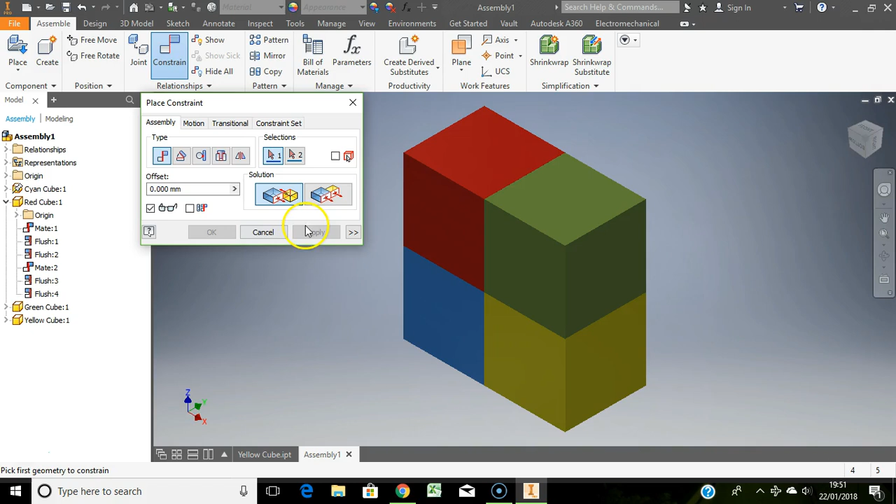In the first video we made one cube which we coloured 4 different colours and saved those as different files. Then we looked in the constraint menu at mates and solutions of mates and flushes in order to create this. If I wanted, I could pull more cubes out and add them onto this side and the back side and build them up. You get the idea, you could do as many as you wanted. But obviously not everything we're going to produce has big flat sides that we can mate and flush together, so we'll have a look at one of the other ones.

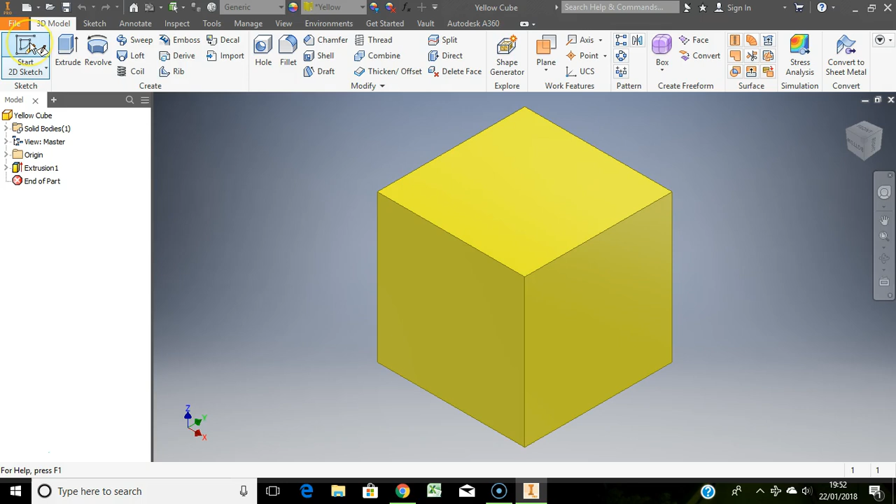I'm just going to cancel that one off, I won't bother saving it, and we're going to make another new file. So we'll go File New and I'll go for a standard millimeter.ipt. I'm still working here in the project file which I made at the beginning of the last video, which was assembly tasks. It's just another assembly task.

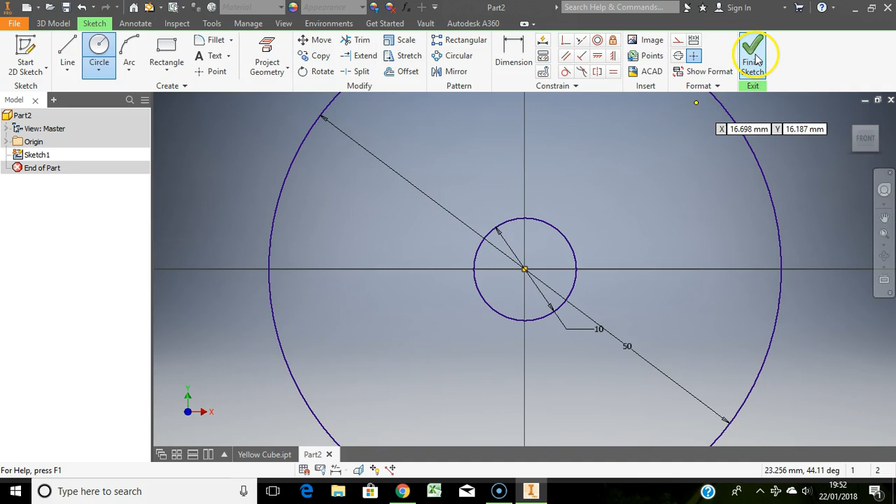So we'll go 2D sketch on the XY plane, and this time draw a circle from the center point, let's say 50, and I'm going to draw another circle from the same center point, and this time we'll make it 10. These measurements aren't really that important, it's just something quick to show you. I'll finish that sketch and extrude the outer ring profile, a bit like a donut with a very small hole in the middle, and we'll extrude that by 50 millimeters.

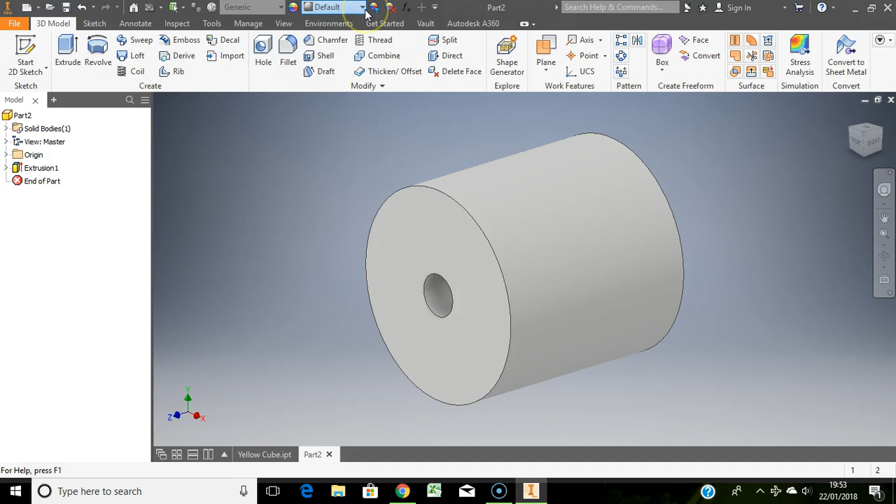So it kind of looks, I don't know, a bit like a toilet roll I suppose, and just because we're doing the last one we'll give these some colours. In this one I'll go down for, let's go for this magenta colour at the moment.

So let's say we've finished this one, we'll go File, Save As, and we'll call this one Magenta Cylinder. Still in the same project, I've got the cubes from the last video, so to keep in the same file management we've got a colour and then the item, so in this case it's a Magenta Cylinder with a hole in it, I suppose.

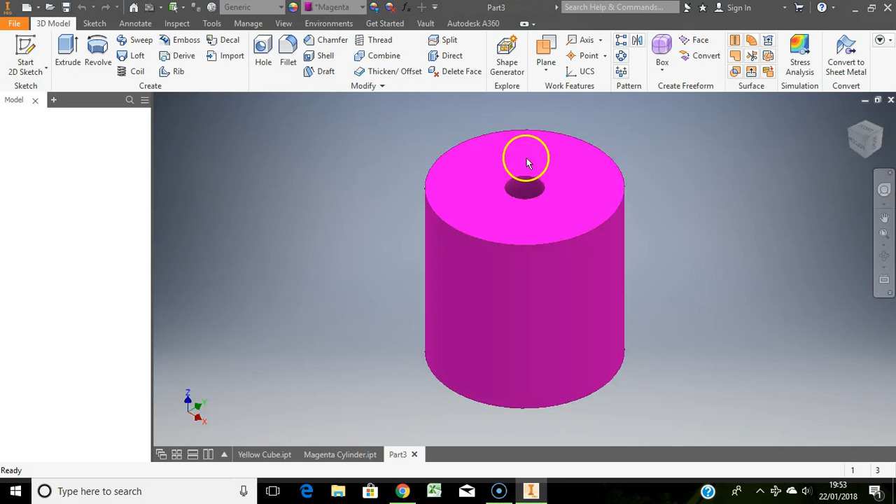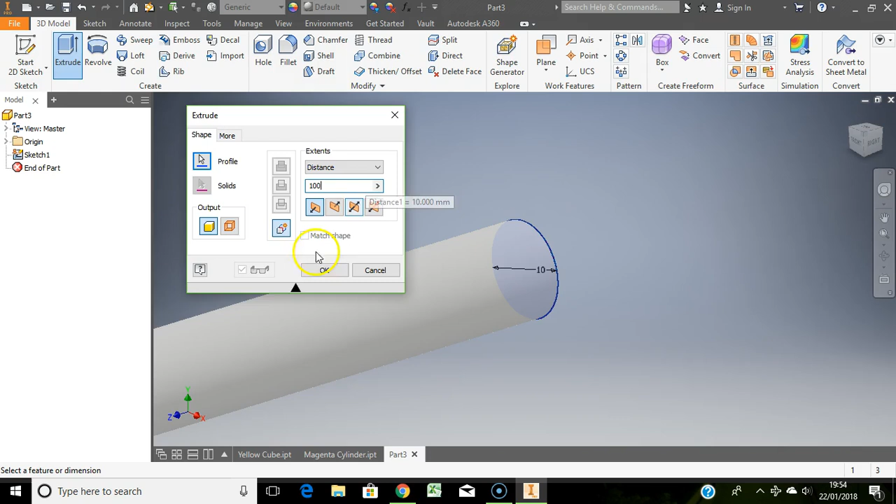So that one's done, we'll make a new file now. File New, another standard millimeter.ipt, and this time we'll produce on the XY plane, do another circle from the center point, and we'll do this one 10, and extrude this by let's say 100 millimeters this time, so 100 millimeters in length, and again we'll go for a colour, this time let's go for this dark green colour.

So again we'll go File, Save As. Important not to do File Save because you'd have overwritten the Magenta Cylinder. So this time we will go for green, let's call it green rod, in fact green cylinder because that's really what it is. So green cylinder in this case, and we'll go Save.

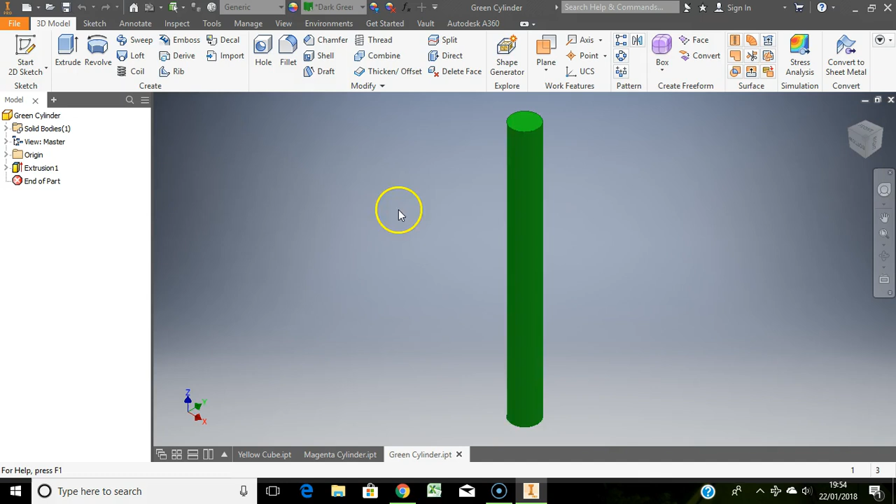So let's say we've got those 2 parts, and we're going to do something with an assembly on those 2 parts as well. We'll go File New, this time not a part file, we'll go into our assembly section and go standard millimeter.iam, and either double click it here or click on the create button, and we're back to the same screen we had before.

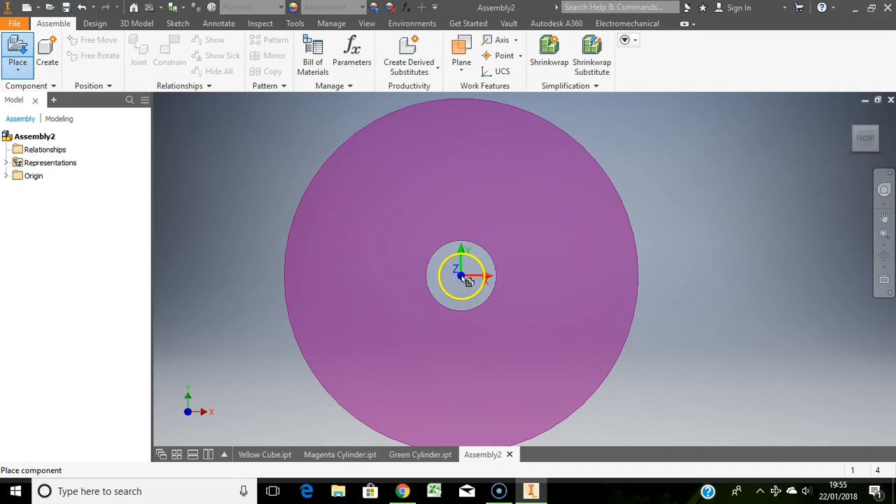So I can start out by placing an item. In this case we'll go Magenta Cylinder, we'll put that one in, and to get rid of the ghosting we'll just press the escape key, or we could have just clicked back on place and that would have stopped that from happening. The second one we did was green cylinder, so we'll just put that next to it. Again, just to get rid of that one, press the escape key on my keyboard, and I'll just zoom out a little bit so we can see it.

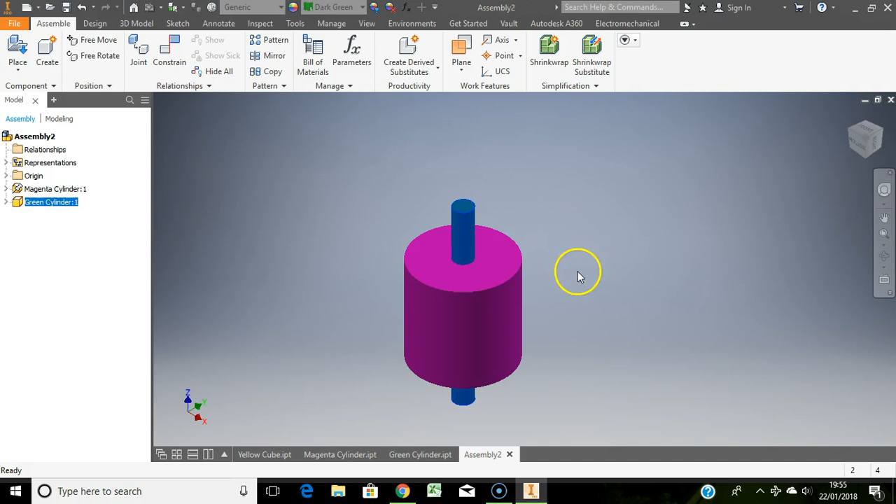Now if you remember, what we don't want is both of these being able to move, so in this particular case I'm going to ground the Magenta Cylinder - it was the first thing I put in, but it's probably the bigger item as well, so generally that's the one I would ground. What we'll try to do is constrain this to go inside the cylinder with the hole in it, and I tend to see lots of people say 'oh yeah, look sir, I've done it, there it is, look' - and visually it does look right. If we were to zoom in and spin around we'd probably see gaps because it's not perfect. But I made this 10 millimeters, and I know this is 10 millimeters from a sketch, so that's going to work.

So we'll go to the constraint menu. This time we're not going to use mates, we're going to go to the fourth one along, which is the insert constraint. When I click that, just like before, we've got two solutions - we've got a solution which is opposed, and a solution which is aligned. As you can see, the bit that's going inside will either sit on the edge or go all the way in and align the top edge with the top of our bigger cylinder.

So actually we're making something very similar to these icons, I've just realised, and that was not planned at all. If I click on the green icon, you can see I can select either the bottom edge or the top edge when I move around, and that's actually going to change something which hopefully we'll show you in this video.

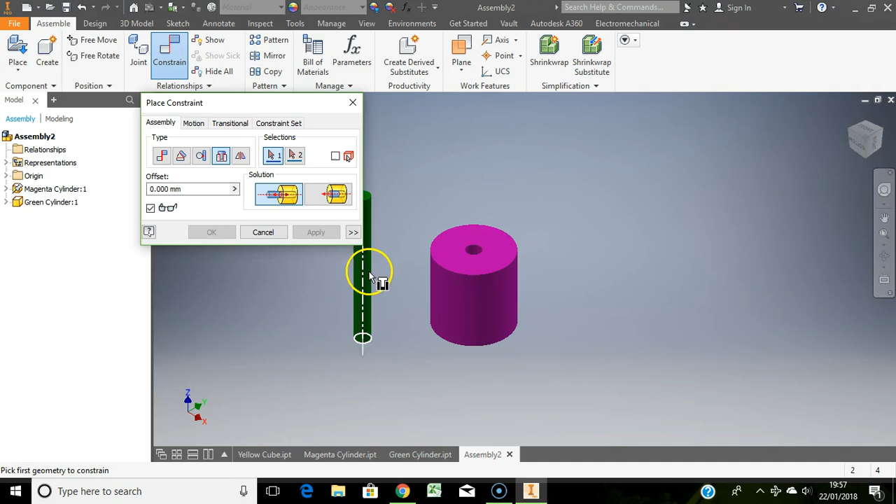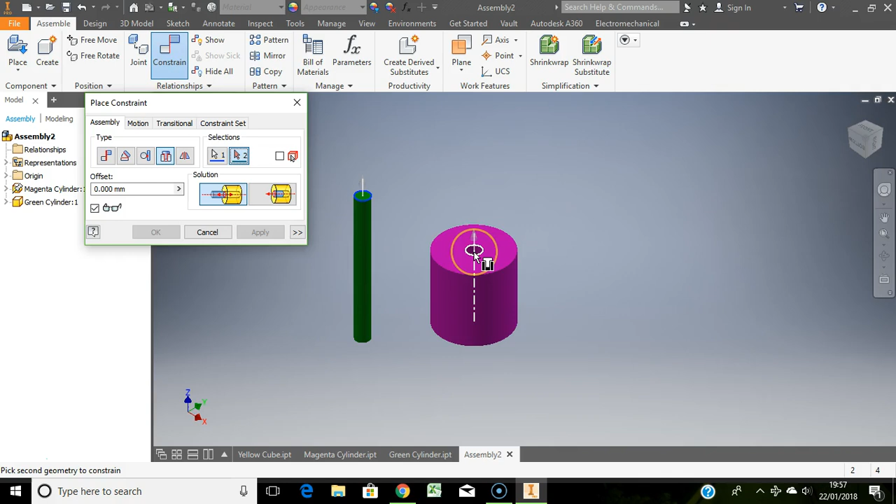If I just click on the top edge, or click on the green, it's highlighted the top edge in blue. And if I click on the central axis of the middle hole, you can see it changes between this bit and this bit. We don't really need to worry about that at the moment because I'm just going to insert it into this little bit.

At the moment I've got a solution which is opposed, so none of the green cylinder goes inside the magenta cylinder at all. Whereas if I'd changed it to this one, because I'd selected the top edge, it's also doing the same.

I'll show you the other option here. If I'd gone to the constraint menu, clicked on insert, but this time selected so it was the bottom of that cylinder that was visible, once I'd done this and moved it, I would have actually got a change in where the green cylinder appears. As you can see, it's either all the way out or aligned with the top edge, as shown in the little icon here.

Now it might be that I don't want it like this, or like this - I actually want it halfway on. We made this cylinder 100mm and the larger cylinder with a hole in 50. So how would I get it to stick out 25mm either way?

There's an option to the left called offset, where I can type a measurement into offset where it's currently located. Depending on if you've selected the top or the bottom of this cylinder, this might need to change. I know for a fact 100 minus 50 is 50, and if I split 50 evenly, it would be 25 stuck out.

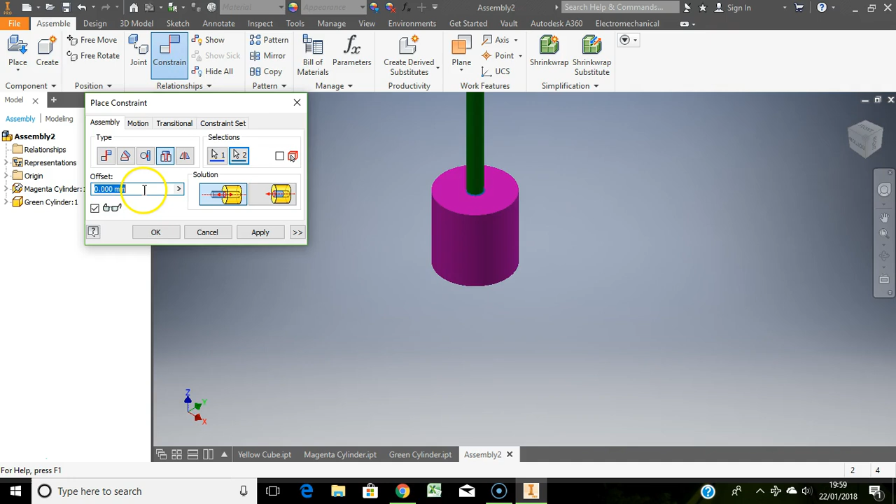So this time I'll go to insert - I'm starting to lose my memory, I can't remember if we did it at the top or bottom last time, but let's have a go. If I'd done it like this, and typed in 25, that's still moving away because I selected the opposite edge. So in this case I would have to give it a minus 75, I believe, in order to put that into the middle.

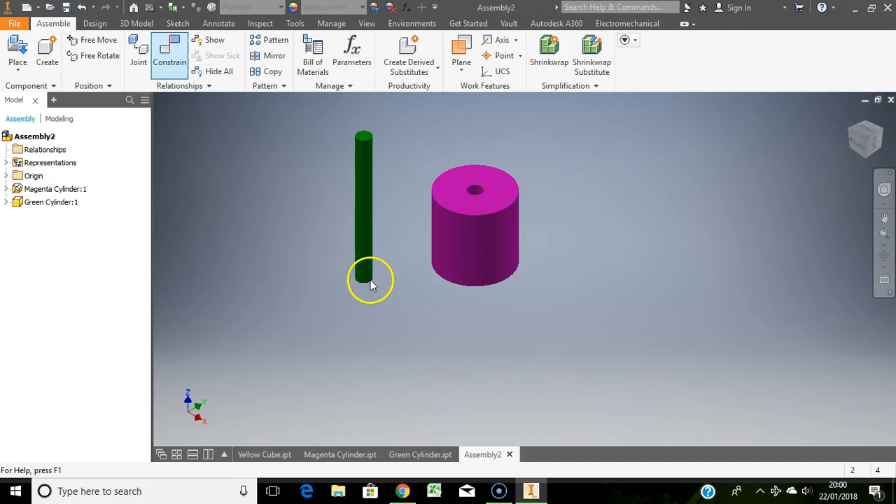So it can change depending on where you are selecting these items, because from this blue halo, this blue ring here, to this blue ring, the distance is actually 75mm, which is kind of obvious when we say this is 100, this is 50, and I want 25 either way. So depending on where you select, you may have to alter that amount.

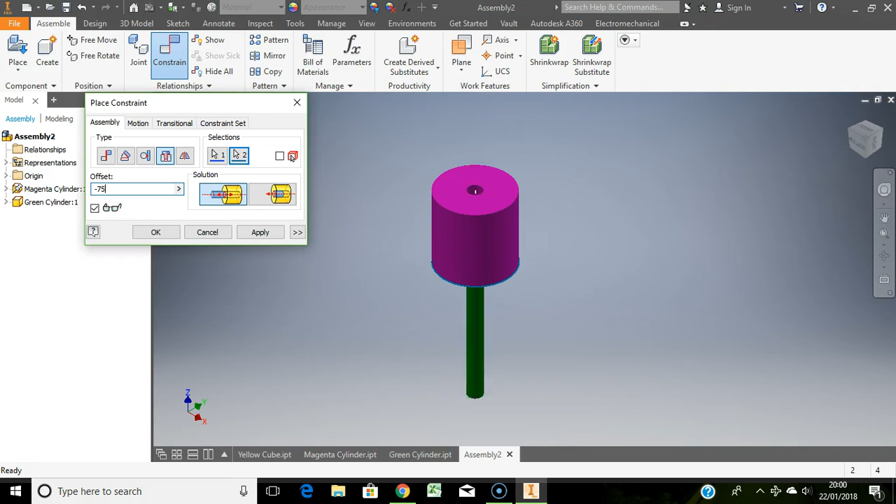I'm really keen to see if I can get it without doing the minus now for you. No, it just doesn't want to do it. But we sometimes have to change this offset amount in order to set this into the position that I would like it to be.

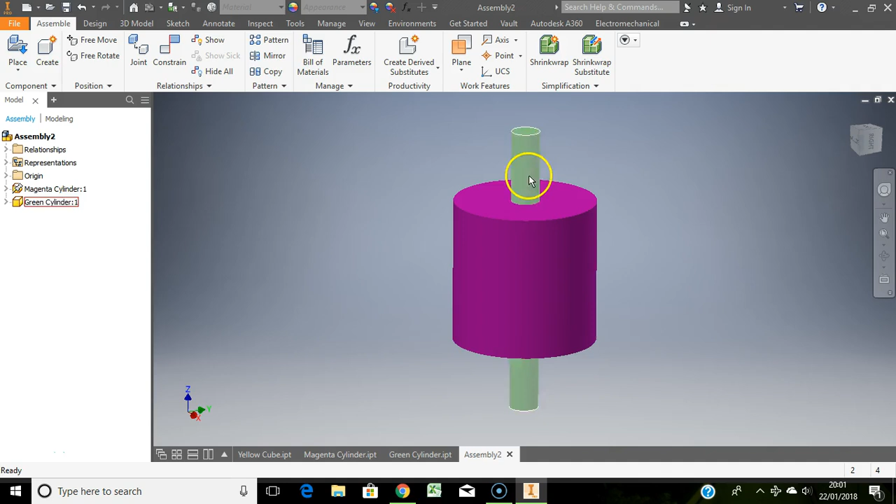So we've centralized that. I'll just apply this for the purpose of this video. Just one thing to note - because I've done an insert, I've not actually had to use 3 constraints here. I've constrained it in the Z direction by setting the offset, because I can't move it up and down, and because I've inserted it, I can't move it left or right.

But what you might find is you can probably just make out from the pixelation that this thing actually spins inside the hole, and if this wasn't grounded, this would also rotate around the outside. Unless I'd got some sort of flat element to align, I wouldn't generally be able to stop that, because I'm only giving it a single constraint rather than the 3 like I gave it before to make it solid so it would not move.

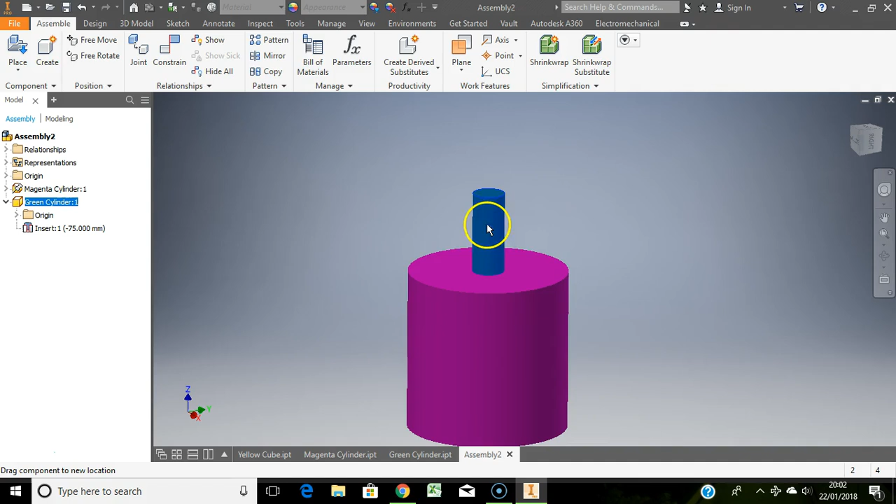So at the moment this rotates. That's not an issue - it can't move in and out, so it's just rotating around inside the cylinder.